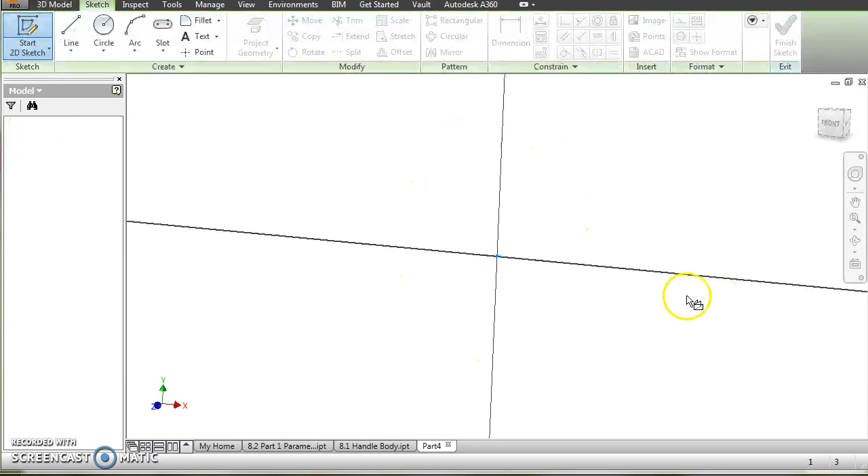It's 6875. So I'm going to go into Inventor. I'm going to start a new sketch. Go ahead and open up a plane, draw a circle. All right, and that is 6875. So we'll put the dimension here, 0.6875, and then if we look at this, it's 344 thick. Finish the sketch, extrude it.

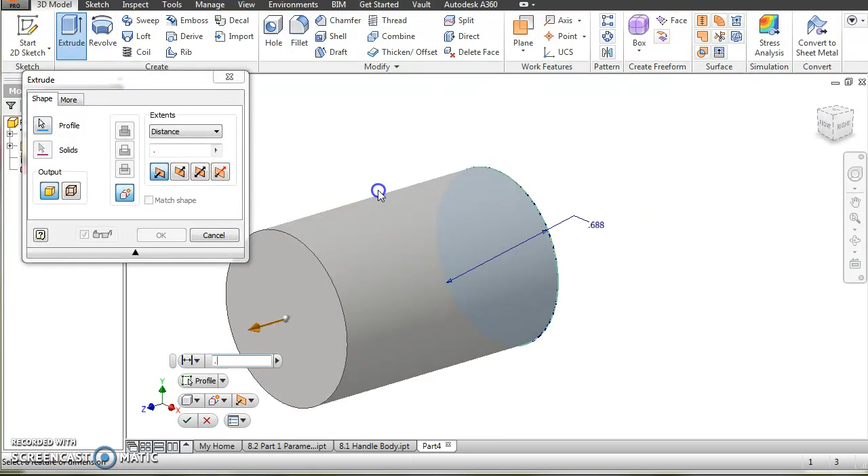0.344. Now we're going to add our radius to it. Our radius is 125, and that is fillet. Add the radius, 125. Okay, so now we have the radius.

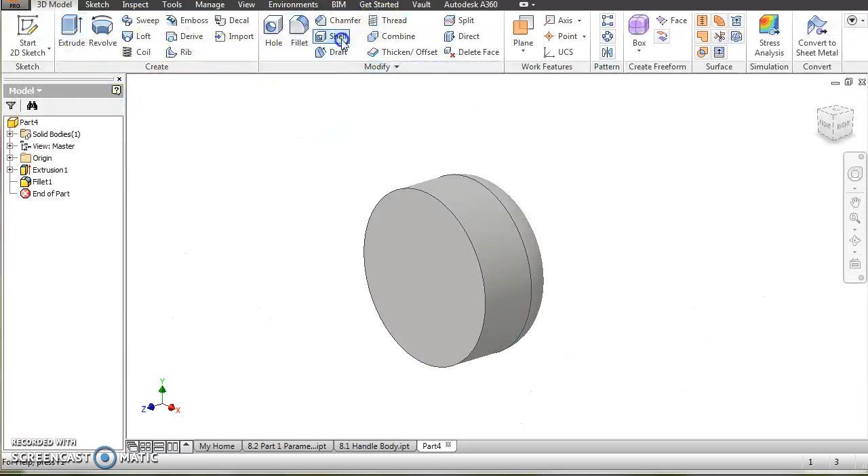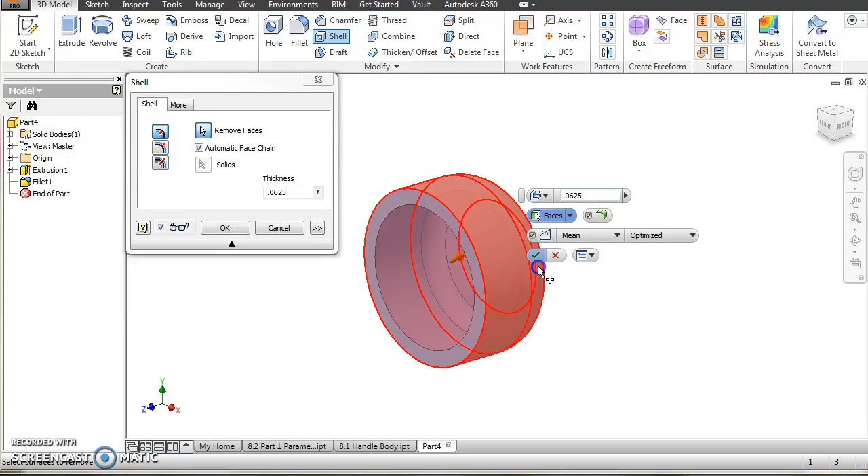Now we're going to shell it out, 0625. Shell. Pick your surface, 0625. So when you pick the surface, you'll pick the face that you want to go away. And what it does is it imagines that face goes away, but then gives everything a uniform thickness. And that uniform thickness is 0625, 1/16 of an inch. All right, so there we go.

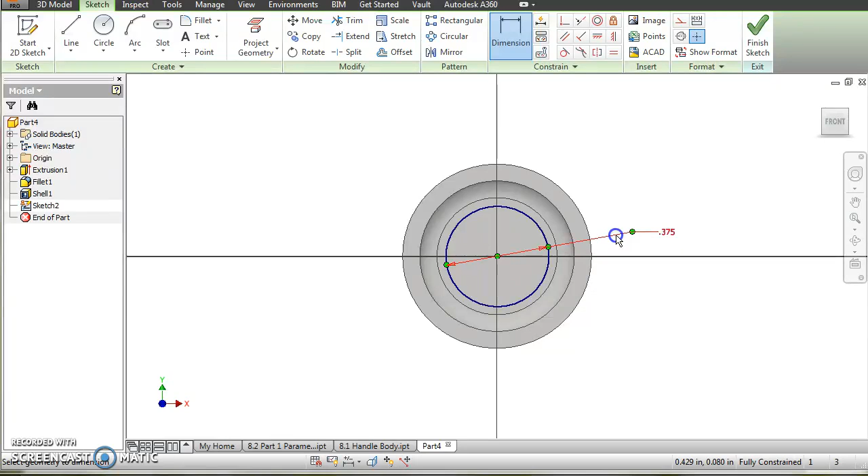We have that done. So now we need to put the post in the middle, 1875. Notice that's a radius, so what do we have to do to it? We have to double it, so we'll make a sketch, circle, dimension, 0.1875 times 2. You can do the math right there. The post is now in, finish the sketch, extrude it.

It's going the wrong way. We want to go up to next. Okay. Now we have that, so we can go and put our counter bore in.

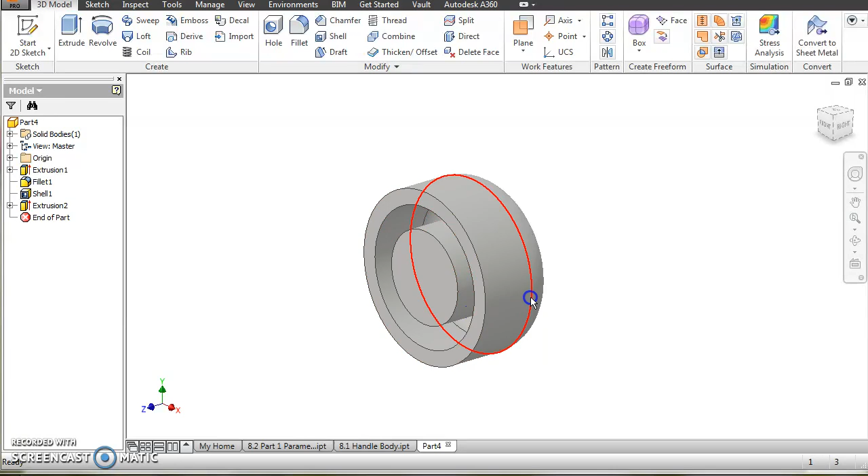We need 1875 through, and then we'll come back and look at everything else. Rotate around to the other side. Draw us a sketch. A lot of people forget to put the points, and that's the point that drives the hole command. Finish the sketch because it's right there in the middle. Run the hole command, and it's automatically going to find that point. And where did it hide my...

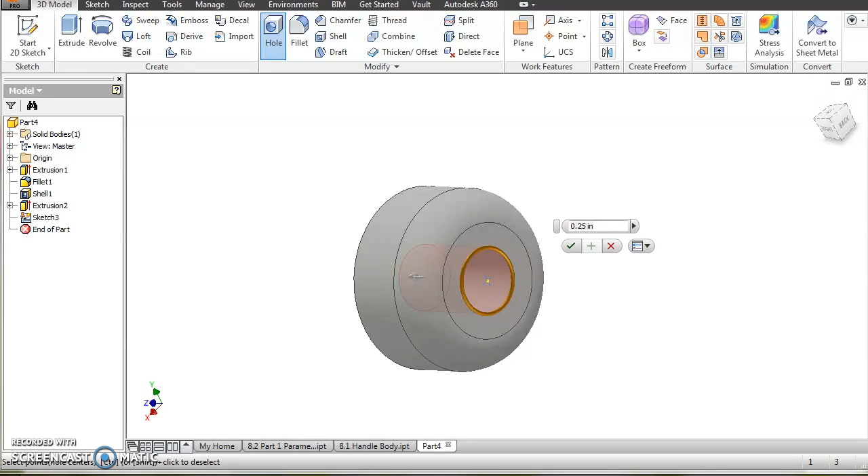Okay, I want to pause the video real quick and go find it on my other screen, which is currently turned off. I had to start my projector so I could drag this over, because it's kind of hard to do the hole command without the dialog box that allows you to select everything.

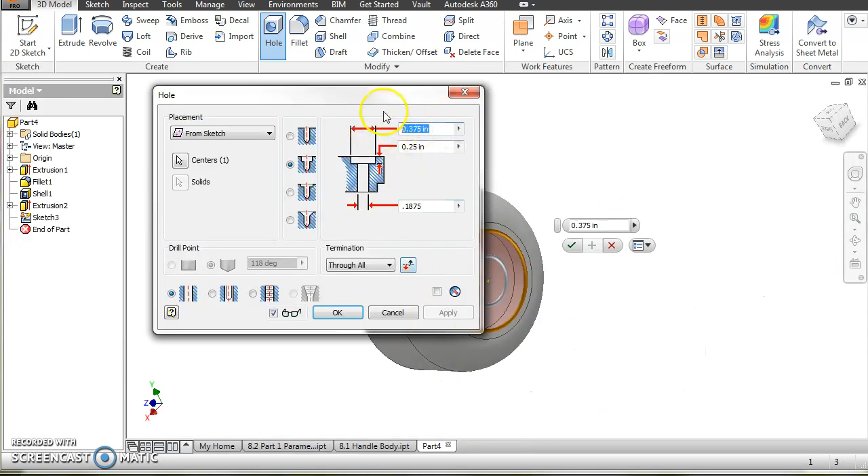So it's been a while, let me go back and see what size it's supposed to be. It is supposed to be .1875 through, and it is a counter bore. The counter bore itself is .3125, and it goes down 1/4 of an inch. That is everything, and then it goes through all. Look at this, through. Hit OK, and there is your counter bore that makes the bottom of the foot.

The only thing we have left to do now are the ribs. If we look at these, they are 94 thousandths typical, meaning all 4 ribs are 94 thousandths wide, and it makes an X.

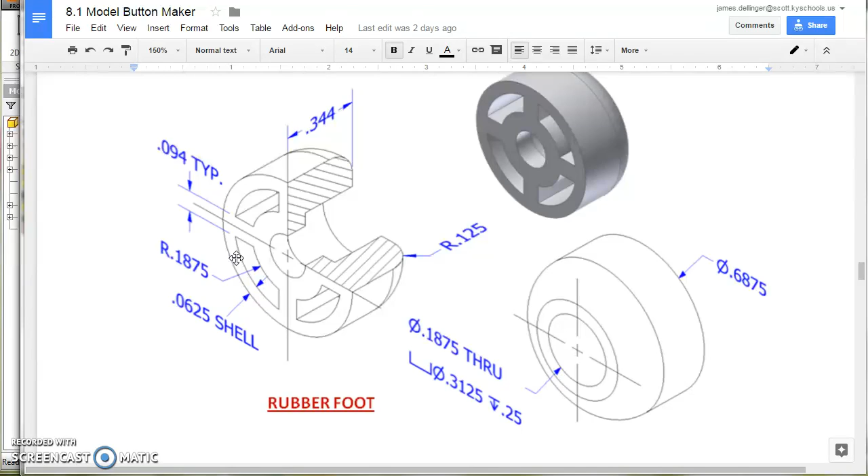So we're going to make a sketch on this face, and we're going to do a few little offsets to make our life a little bit easier. We're going to put a line through the middle, vertically. Yes, I'm going over, that's perfectly fine. And then I'm going to do some offsets.

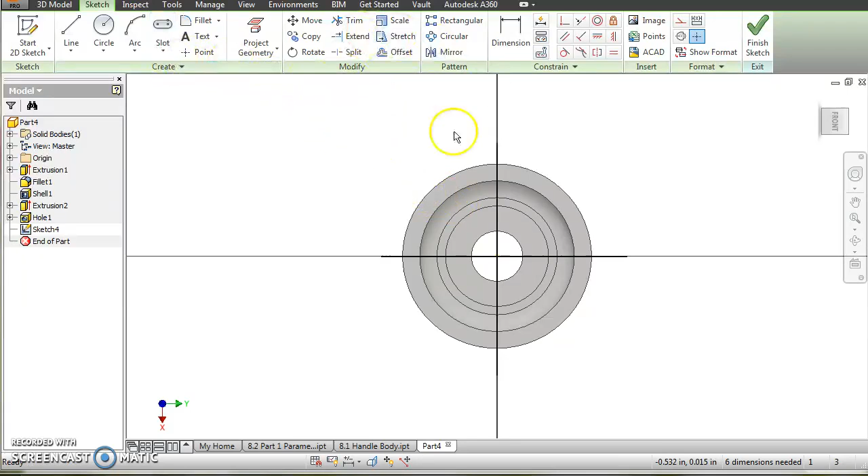So I'm going to offset. First, I have to project it because it doesn't work otherwise. Project geometry - I'm going to use this circle, and I'm going to use this circle, and then offset it. The reason I'm doing this is it seems to work better if you offset it a little bit. Sometimes when it's right on the edge, the computer doesn't know what to really do with itself.

So if you go into the model a little bit - you can't see my air quotes - it just helps it from bombing out every now and then. It's pretty rare, but occasionally it'll do that, so that's why I extruded those inwards so they're not right on that edge. It just works better. And then we're going to use an offset command, and we're going to offset this.

What is our thickness supposed to be? 094, .094 divided by 2. Same thing here.

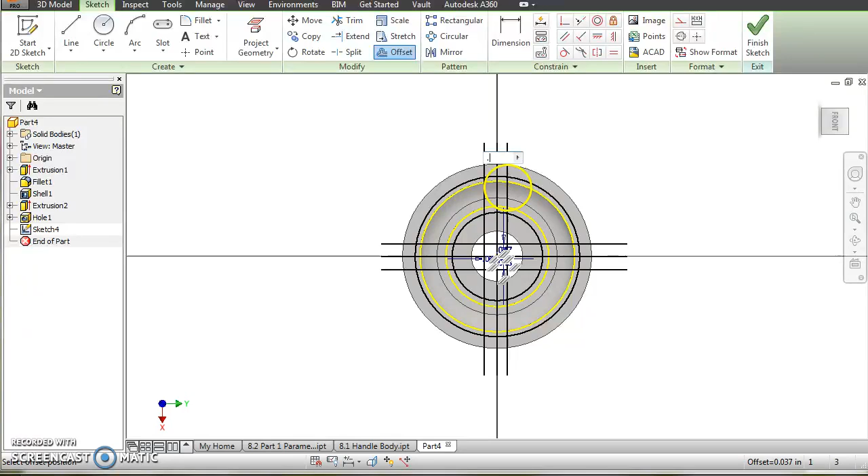And so when we get this done, we are going to basically have our ribs in there. We just need to trim everything out and then make the middle ones construction lines.

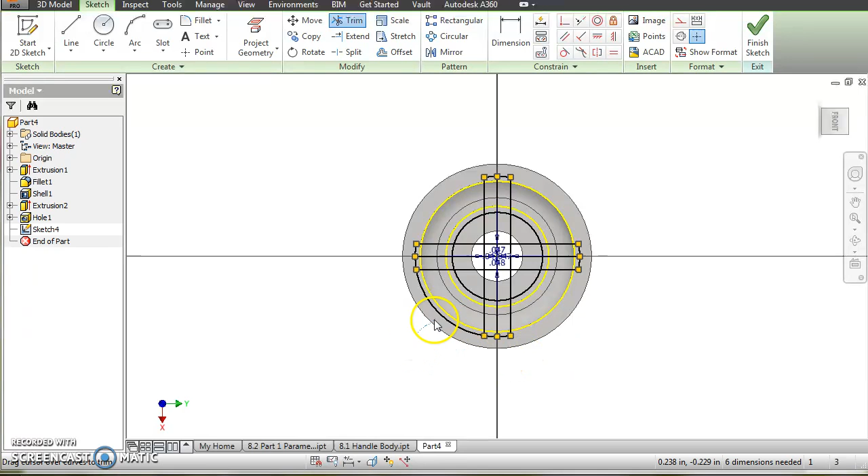All right, so let's go ahead and trim it out, and those are the ones that we're going to keep, what we want. We'll go in here and really do that up there. You'll notice that when I did my massive trims, it turned a couple of those, or turned my construction lines into regular lines again.

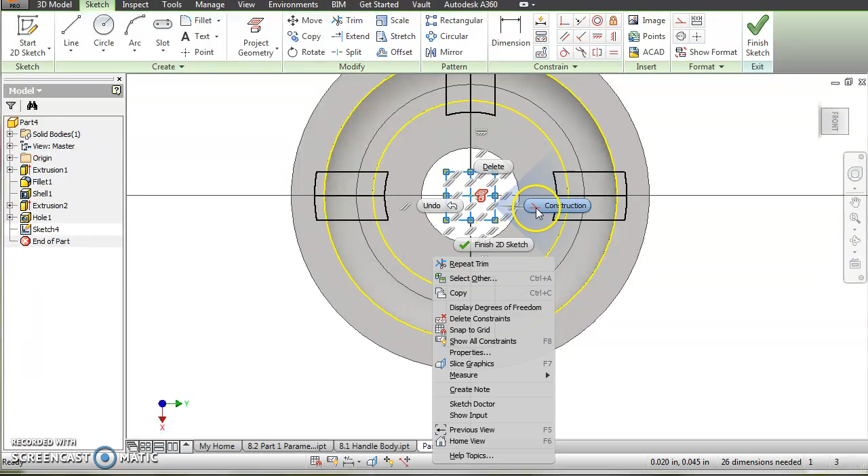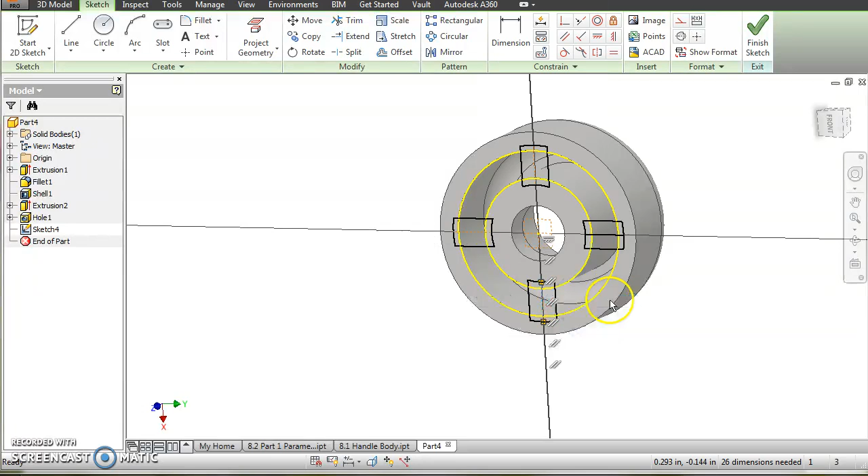So let's go ahead and turn these back into construction because we don't need those. This is a construction line, and this is a construction line. I must have more than one line on top of one another - there we go. Finish the sketch.

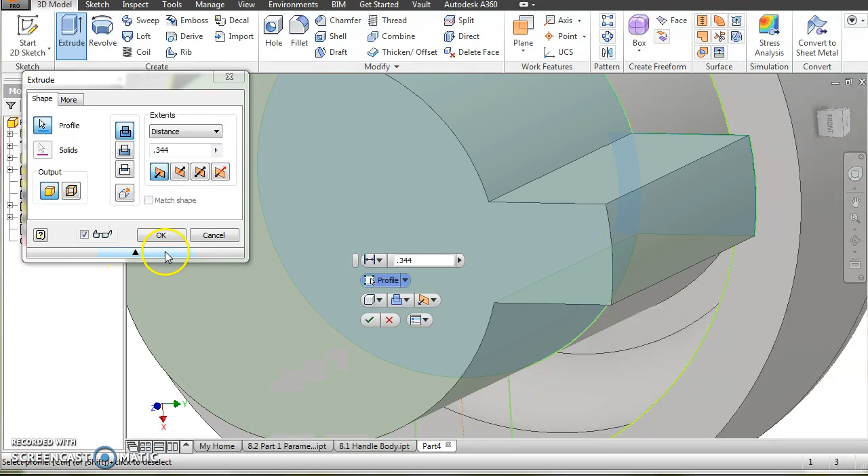Extrude, pick my 4. Cancel that, let's try that again - this time not picking where I don't want it to be, which is, it's trying to pick up those - it's trying to pick up these projected lines. So let's go ahead and try that one more time.

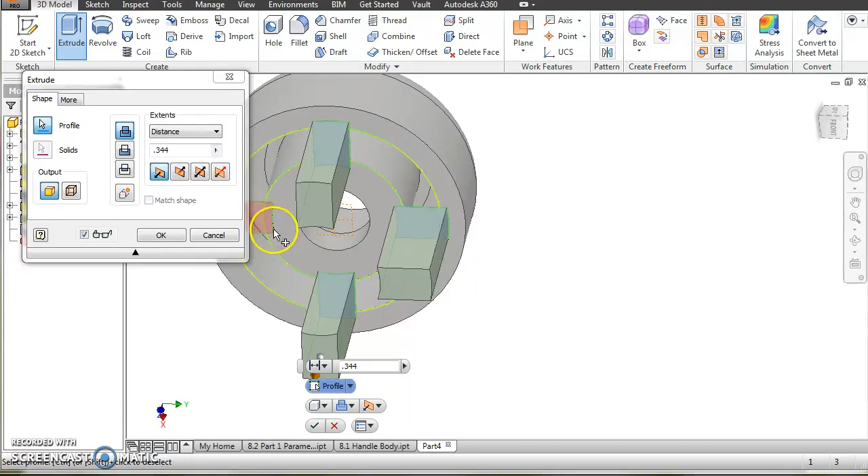So I'm going to want - just take your time, get it where it's highlighted. We're going to flip it around, go up to next, and we are going to say done.

Oops, and I wound up cutting it. It's all right - right click, edit feature, switch that around from cut to extrude, and now we have our ribs on the inside. And that is the part.